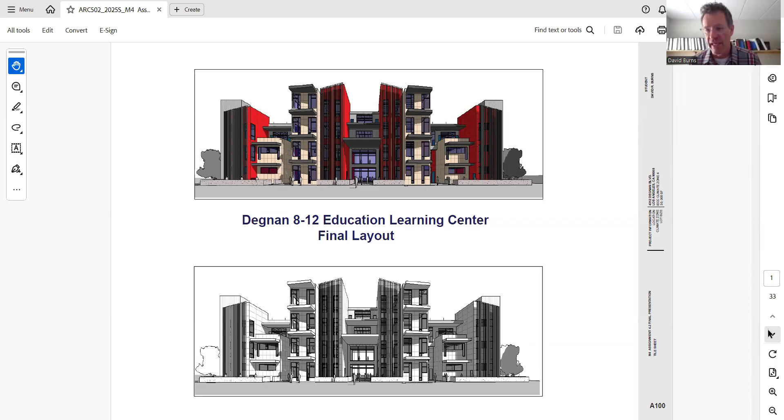So my site is located in the greater LA area, southwest of LA. Some of the climate notes are Mediterranean climate, kind of mild, hot summers, cooler winters. So in our design, we had to accommodate more of the cooling aspect of the site than the heating. Heating is not much of a factor, so cooling was a big task to undertake.

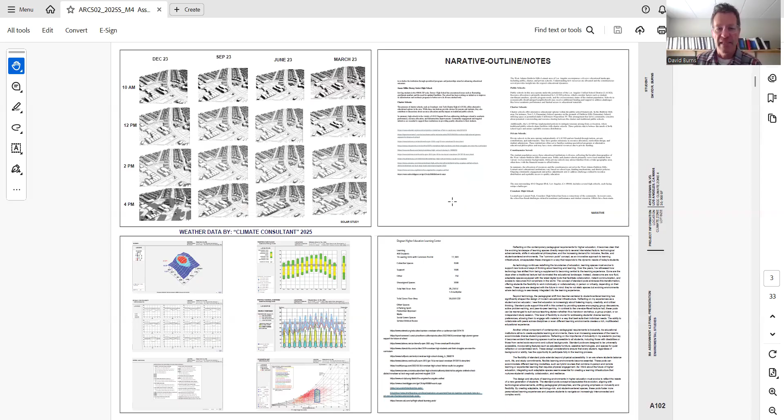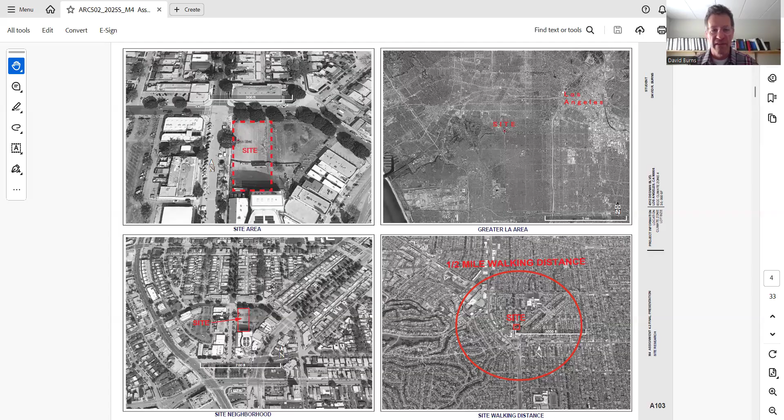So here's one of the concepts I was working on. So I was tasked to do 3 concepts. Here you can see the site. There's the taller building here. Most of these are 2.5 stories. So it's kind of low in height in the surrounding area.

Site plan. And this concept was 3 buildings where you could walk through the buildings to get to either of the buildings. So street front here, street here. So access to all these buildings would be off the street. This is kind of a parti I did of sketching one piece here lower on the ground level, and then some stacking buildings on top of that.

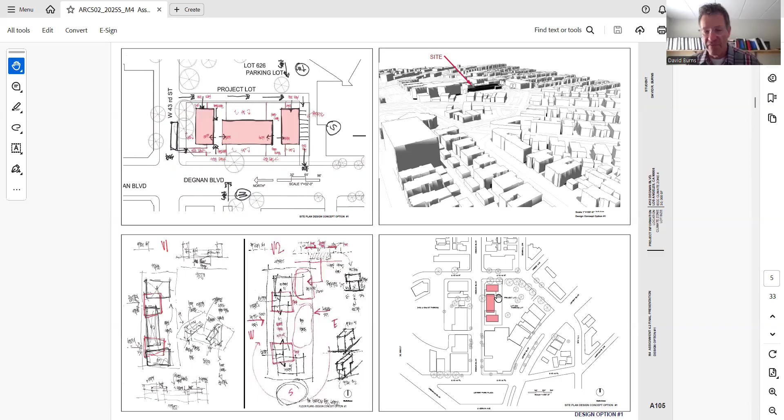Here you can see 3 buildings on the ground, how they kind of fit in the site. Some more further studies, 3 building concept on the ground, and then some stacked floors above it. So if you look at this plan, here's the stacked buildings on the ground here, walkways through that concept.

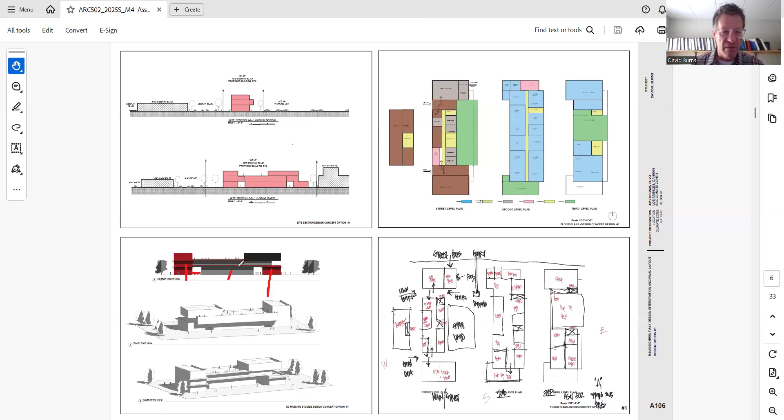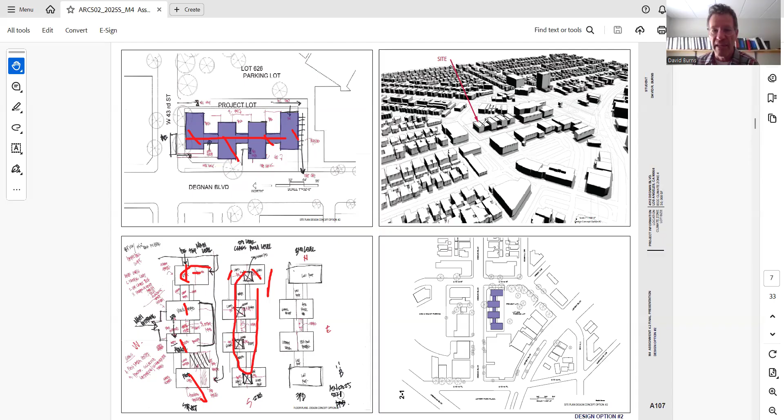Next concept was a 4 building on the ground floor. So building here, building here, building here, building here, with a walkway connecting to it, which is the smaller spaces. Here's some sketches of the floor plan, unit here, unit there, ground floor, and then some stacking of the buildings, higher in the 2 centers and lower on the bottom.

Third, sorry, my screen.

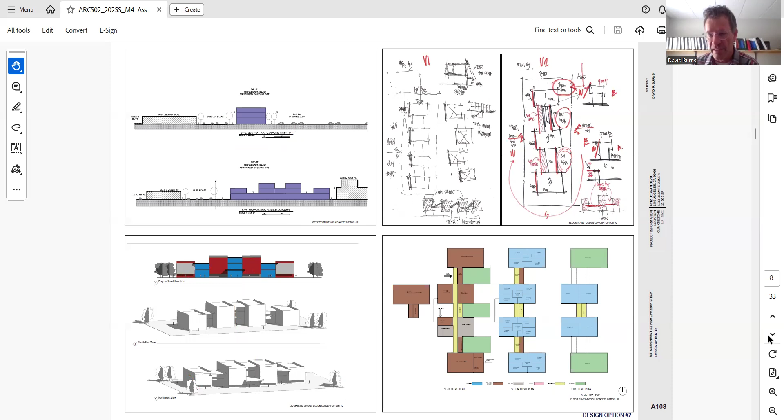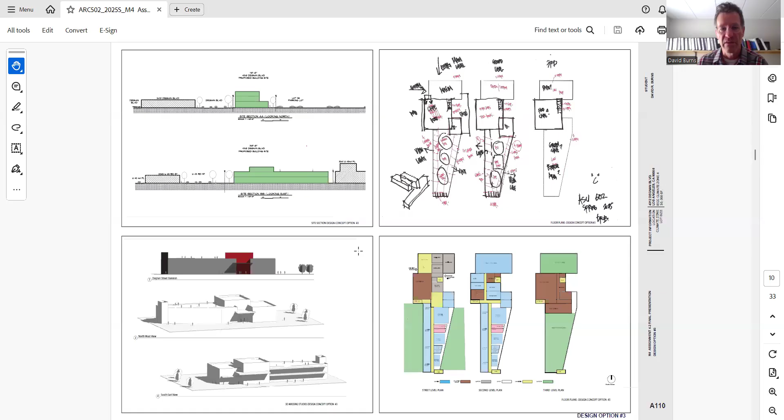So third parti is more of a flat, a low slung spread out over the property, again 3 buildings put together where we have a big main floor. Then I'll go upstairs. So 2 big main floors with another higher piece on the 2 ends of this one. So I talked to Michael about what we discussed as probably the best layout would be the 4 buildings with the connector piece in between.

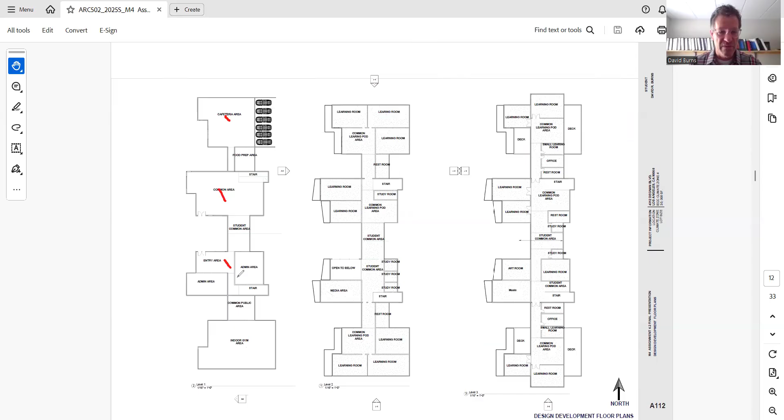So here's the general layout of the plan to start with. I broke it up into 4 pieces on the bottom. This one is a cafeteria. This one is a common area. This one is where everyone comes to enter the school administration, and this was the gym.

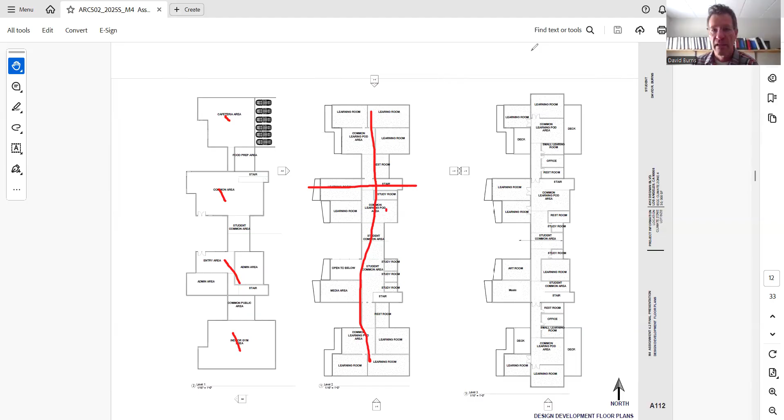And then upstairs, using this long corridor with learning centers on either side of the corridor, but allowing some high windows and some cross ventilation where these are open pod spaces. And then just going up a little higher. So third floor, these are the floor plates, street level, second level, third level, and then the fourth level, some lower roofs on either side.

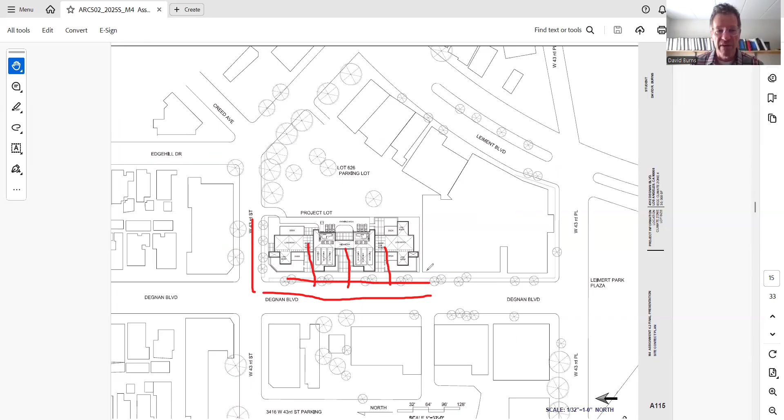The site plan. Again, we're looking at Main Street here, sidewalk, entryway, and entryway. And I'll get into the further development and then parking in the back. Okay.

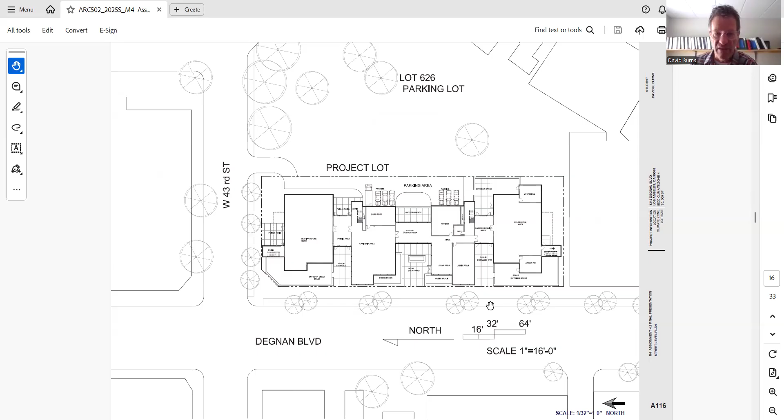So again, we can see more of a site plan here, where we've got the four buildings on the bottom, same concept. They've switched a little bit, and I'll get into that in a moment. But again, everybody's loading off this main street, off the sidewalks, into three different entrances.

So here, you can see the street level plan. And what I did was I broke it up into two more public spaces out here, which is the multi-purpose area, cafeteria for students here, and then the administrative entry to the school here. And then this is the indoor gym here, or auditorium, gymnasium. So this is the main entrance here, public entrance here, and a public entrance at that location.

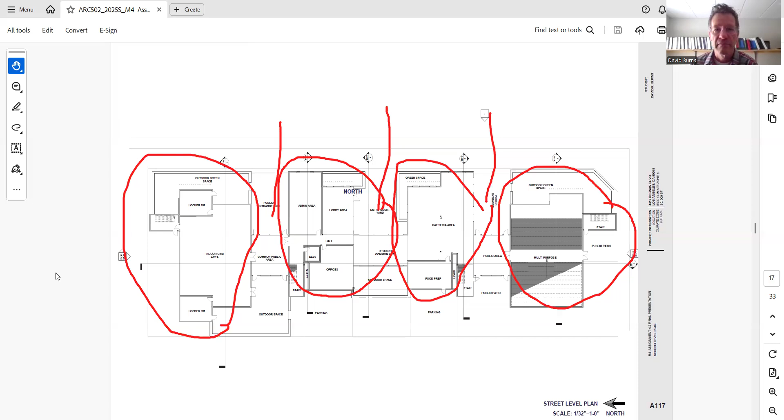Upper floor, excuse me. What I tried to do here in the concept was do some learning centers. So this is kind of a higher education building, the site's compact. I wanted to do higher education because older kids could use the elevator and the stairs; elementary kids, I didn't want them going up and downstairs so tight.

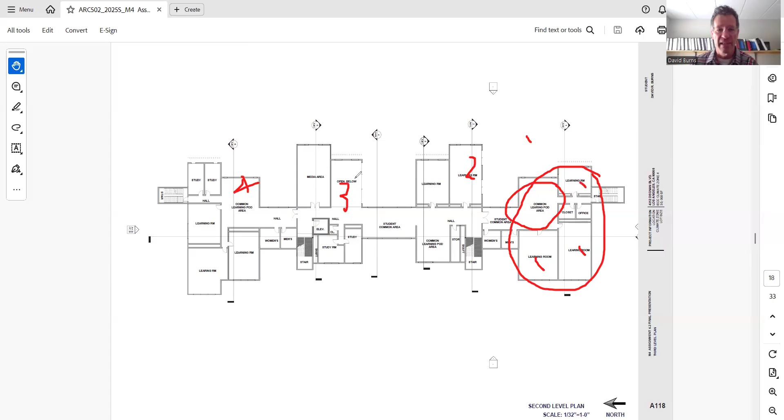So I went vertical. So the concept was to have some classrooms here, private classrooms, and then surrounded by an open learning concept area. So we've got 1, 2, 3, and 4 of those pods. So we could have 12th, 11th, 10th, 9th grade on this, and every grade has a little learning center that they can use. Going up to the next.

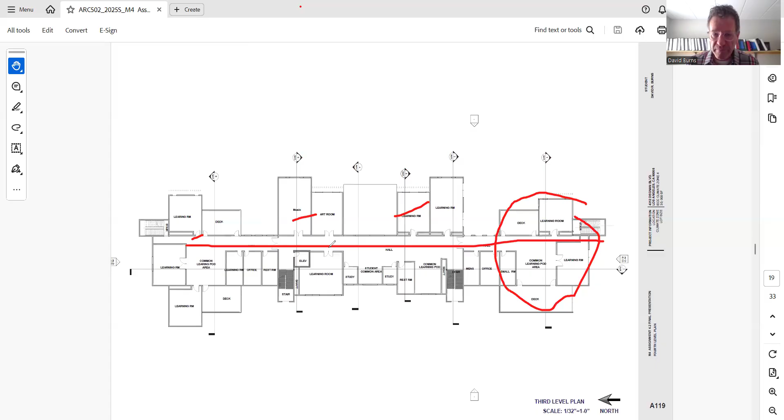So again, going upstairs with this, this one has the long corridor, but again, we got the pod as a concept. Because it's a narrow site, I was able to get some cross ventilation by having these open pods in the back and the learning areas up front, so we could get some westerly views coming through. Next.

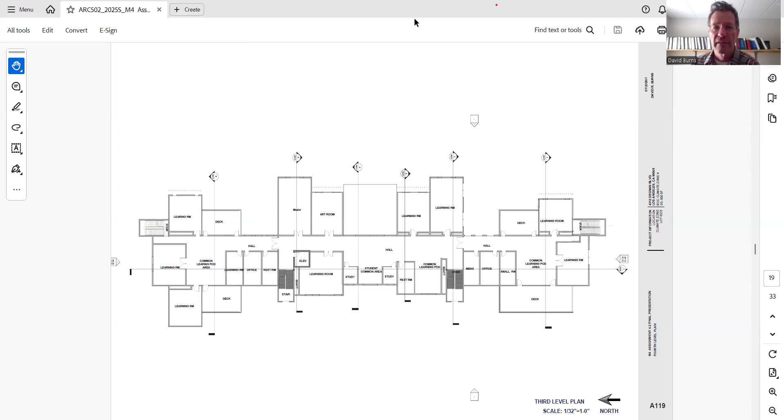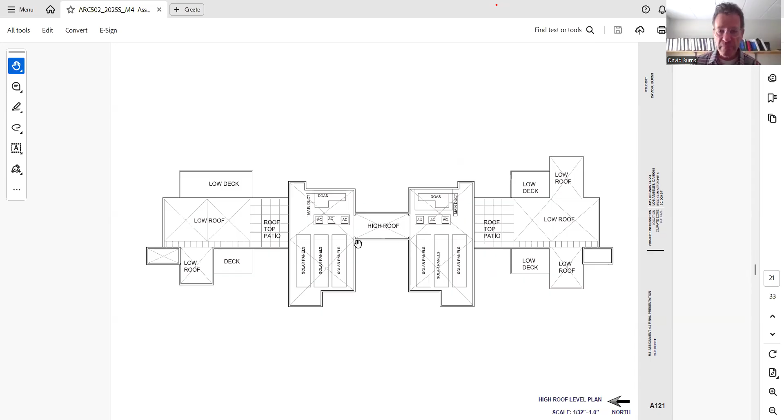So next concept, kind of a roof plan. So we have some low roofs here, some green spaces out here, higher roofs, solar panels, excuse me, heating and cooling. And then again, low roofs, green spaces over there. So kind of the elevation, broken up into the wings, stair towers on the sides, and then central entrance corridor here, front street elevation.

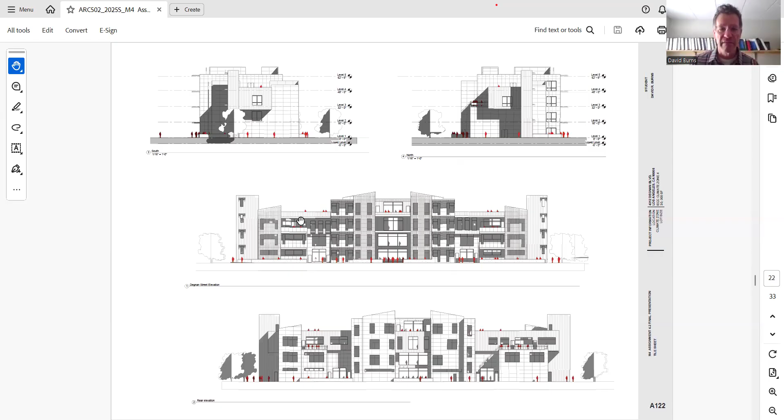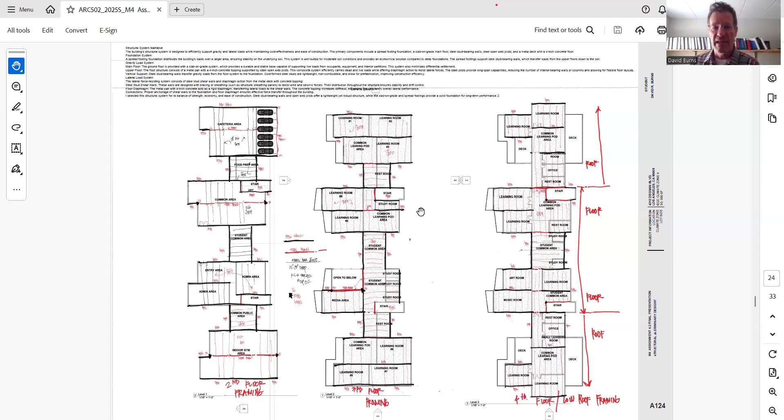Kind of trying to obviously mirror the architecture over the center. Some building sections on the concept. So again, the concept was, and I'll get into this further, to have cross breeze, and some general structural plan. Bearing walls, everything stacks pretty much, so we could do a stem wall foundation footing, use the bearing walls, steel web joists, concrete pan. Here's how the structural floor is laid out, floor plates.

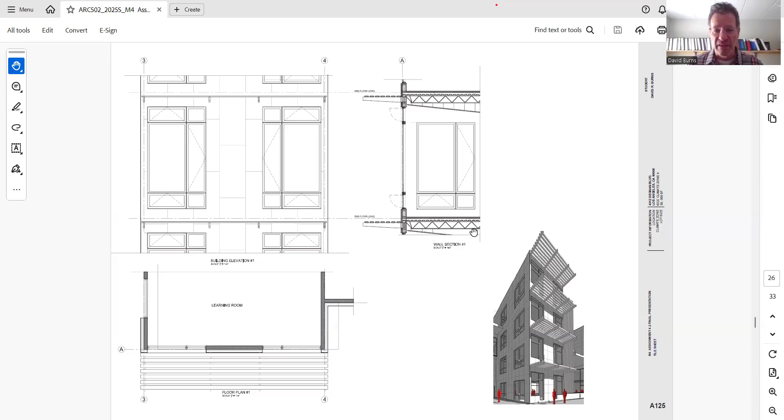So this is the concept of the window wall, rain screen concept. And in this particular case, I'm trying to shade the west facade with more horizontal shading above the windows. So I have a steel beam and then some members above it to provide the horizontal sunshade. This is the other concept on parts of the building where it's more of a vertical metal fin. You can see it's 3 feet out from the wall.

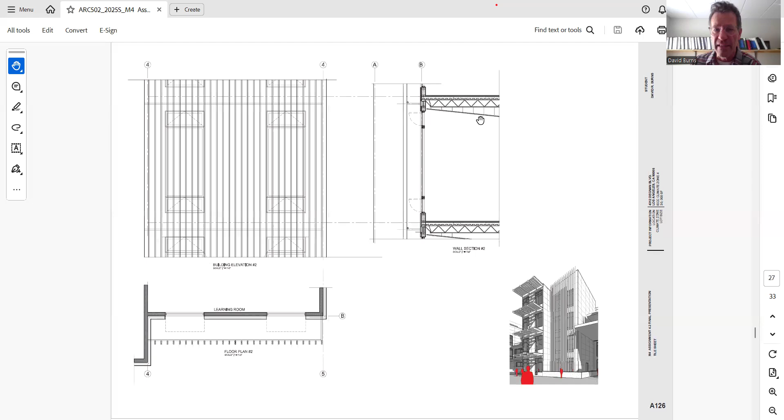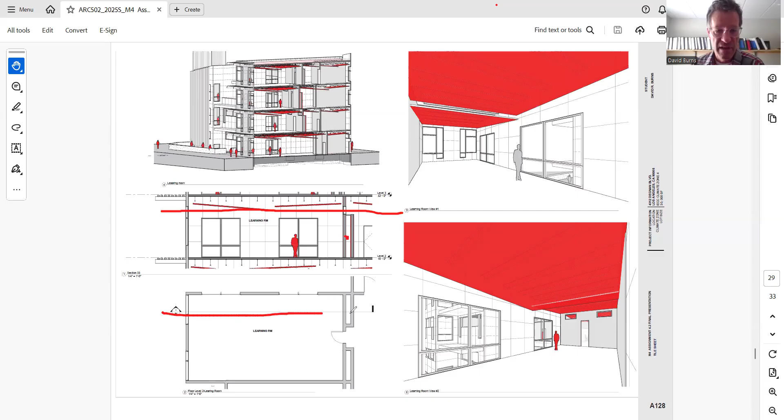So here on all the windows, we have a low awning and a high awning to get some cross ventilation. Here you can see more of the wall sections. Rain screen detail, metal panels, again, high and low cross ventilation. Here's a view of a typical room. And again, you can see where the high and low windows allow the cross ventilation. So exterior wall through the classroom, high window above this. This space could be used for books, shelving, desks, but allows the airflow to the top part of the space.

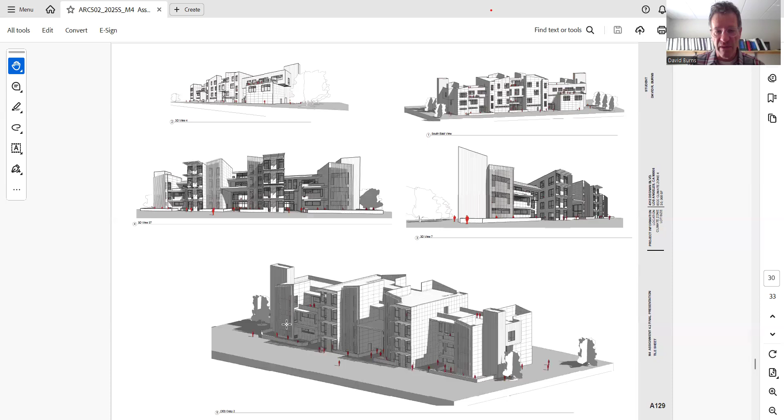All right, just some axonometric views of the building. Again, this is the western side, so lots of shading in and out, overhangs, roof decks. Here you can see the vertical. These are the horizontal. Some more views. So this is the entry view here. Big covered overhang entry. You can see on these two sides the vertical fins for the solar shading. This is another side entrance, public entrance, where you can see the different horizontal shading. Another entry where you can see the vertical.

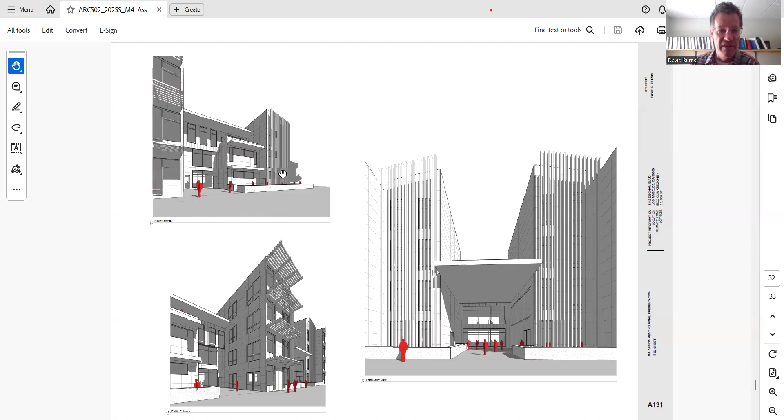For this site, again, all this is west facing, so it's very important to get solar shading devices, the vertical, horizontal, the natural ventilation through the space. Cool roof materials up on top, green roofs on some of the lower roofs here, high performance glazing, exterior wall insulation with the rain screen, and a high performance building envelope.

Active system, mainly worried about cooling. So we've got the DOAS system up top providing cooling, some heating if necessary, solar panels on top of the roof, and some other active systems. That's the presentation. Thanks.